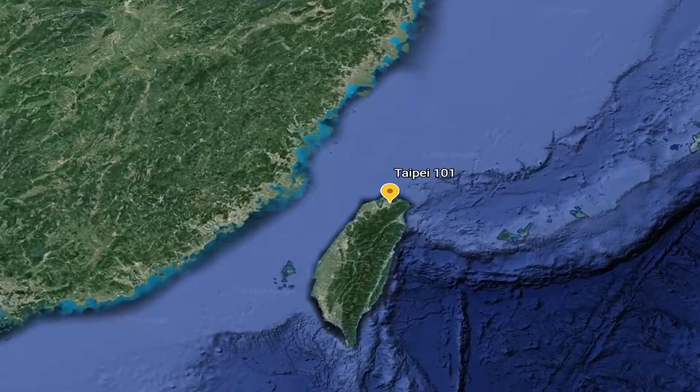Do you remember where we can find Taipei 101? I have mentioned that Taipei 101 is in the upper side of Taiwan, near a river. Its location is also where the earthquakes occur often. Raising a tallest building at that time in that kind of dangerous area was a challenge.

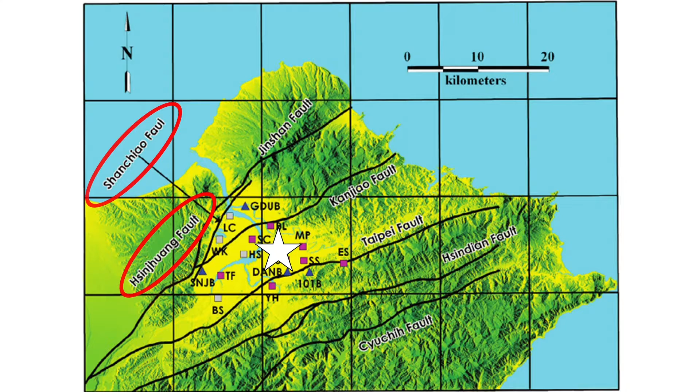As you can see here, 4 fault lines, a belt that seismics occur often, were closely located: Taipei Fault, Kanjiao Fault, Shanchiao Fault, and Hsinjhuang Fault. Among those, Shanchiao and Hsinjhuang fault lines were the major ones, usually causing micro-earthquakes which were less than magnitude 2 before the construction of Taipei 101.

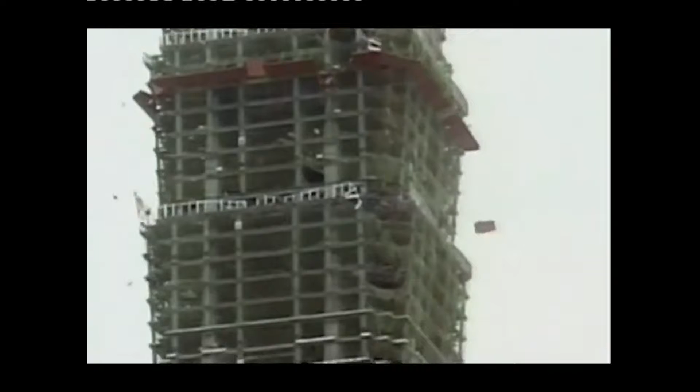Interesting things happened after the construction had started. The magnitude of the earthquakes started to go over level 2. The start was the one that occurred in 2002, during the construction. It destroyed the crane as a result. Many started to wonder if the increase of the magnitude of the earthquake is due to Taipei 101, considering the weight of the building.

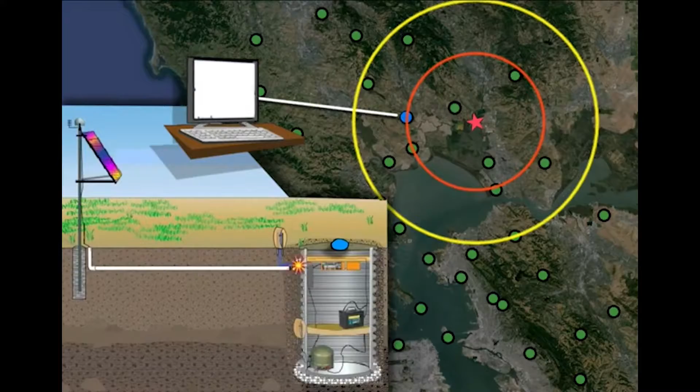Geologist Cheng Honglin once mentioned about this. He suggested that the stress from the skyscraper may have reopened an ancient earthquake fault, since after the construction was finished, 2 larger earthquakes, magnitude 3.8 and 3.2, directly beneath Taipei 101, which were big enough to feel, occurred.

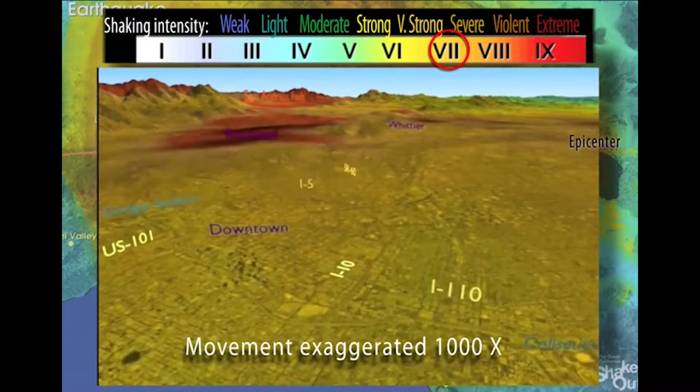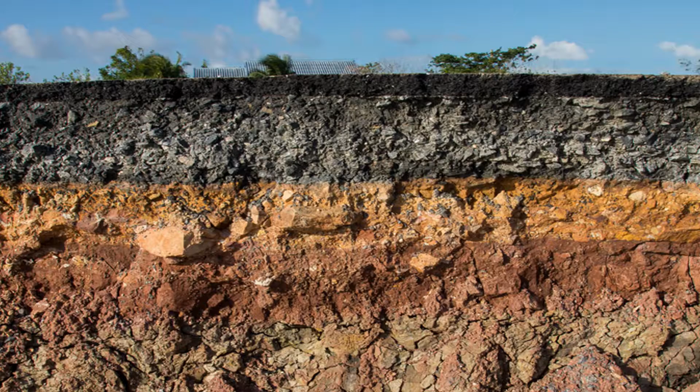On the other side, there was John Vidale, an earthquake expert, who stood against that suggestion. John mentioned that a building will change the stress on the ground below, but this will not be enough to reach the level where earthquakes occur. He concluded that Taipei 101 does not affect earthquakes in that area.

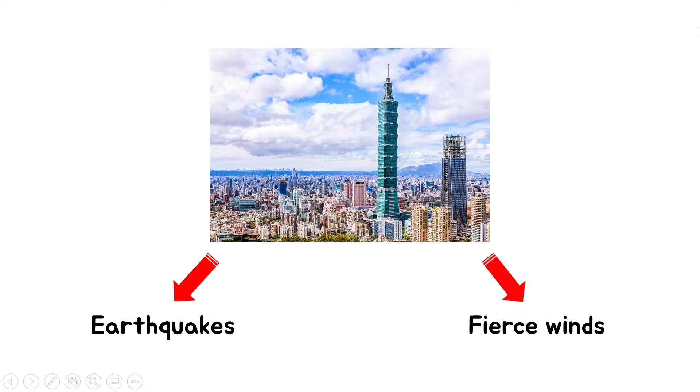Through this argument, what is important and what we must focus on is that Taipei 101 is prone to earthquakes and fierce winds common in its area. The engineers had to design a structure that could withstand gale winds up to 216 km per hour and the strongest earthquakes. Typically, a skyscraper must be flexible in strong winds, yet remain rigid enough to prevent large sideways movement.

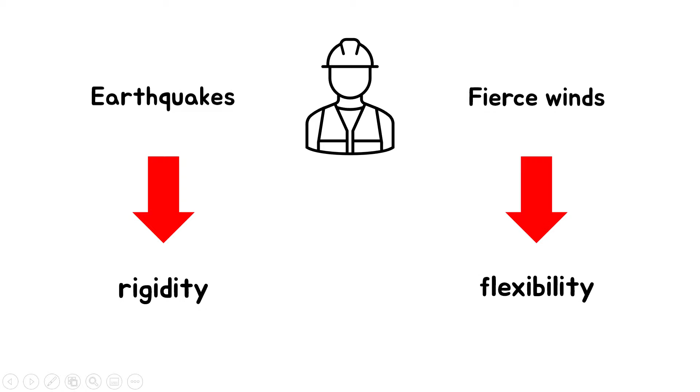Flexibility prevents structural damage, while resistance ensures comfort for the occupants and protection of glass, curtain walls, and other features. Most designs achieve the necessary strength by enlarging critical structural elements such as bracing. But the height of Taipei 101 combined with the demands of its environment called for additional innovations.

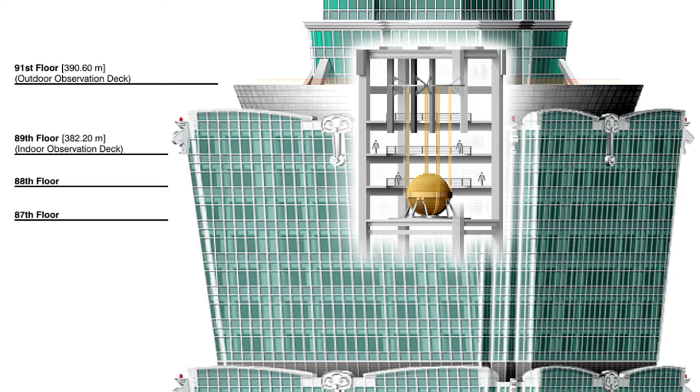To achieve stability and lessen the impact of violent motion, a gigantic tuned mass damper was designed. The damper consists of a steel sphere 18 feet across and weighing 728 tons, suspended from the 92nd floor to the 87th floor. 8 steel cables form a sling to support the ball, while 8 viscous dampers and bumper systems act like shock absorbers when the sphere shifts.

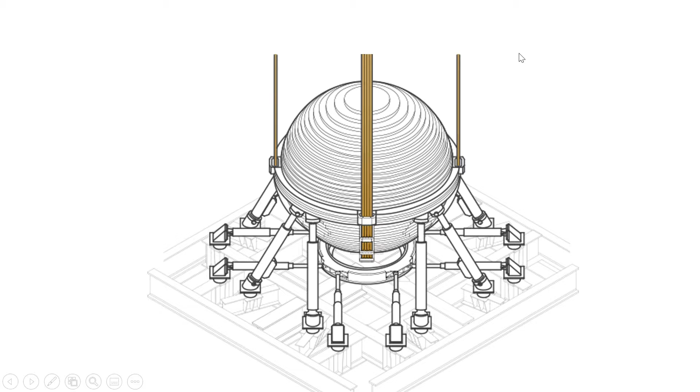How was a damper so heavy able to be applied? The massive damper has a weight of 728 tons, which is too heavy to be lifted with a crane at once. It was divided into some prefabricated sections and welded together. The steel plates, the cradle, and bumper brackets are fabricated on site.

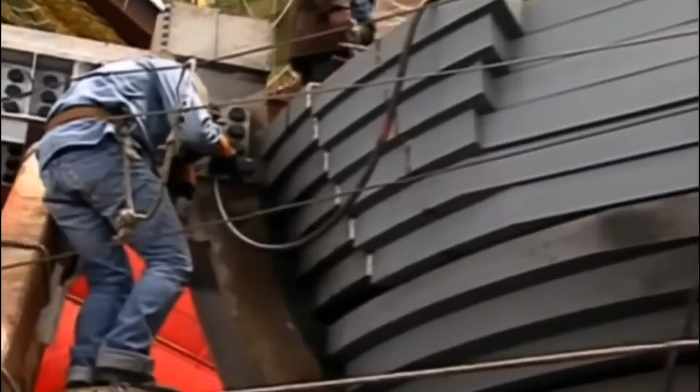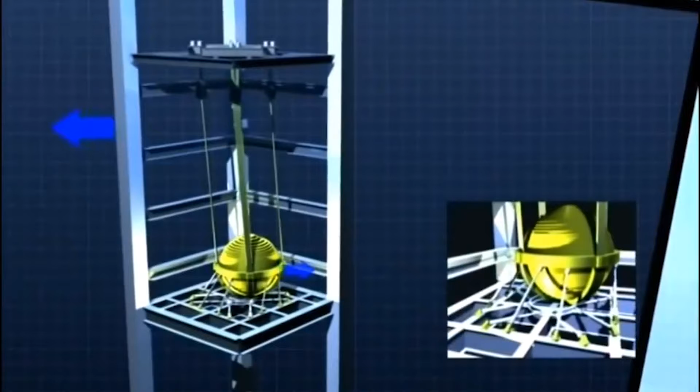It is then hung from thick cables and tuned to make it swing in exactly the opposite direction of the building. That was a brief explanation of the function and structure of the tuned mass damper. Now, let's go deeper for better understanding.

First thing that we will go through is the basic principles of the TMDs. The main purpose of the TMDs is to act as a counteragent to absorb the kinetic energy that occurs when a building moves. Let's look at this principle with a picture.

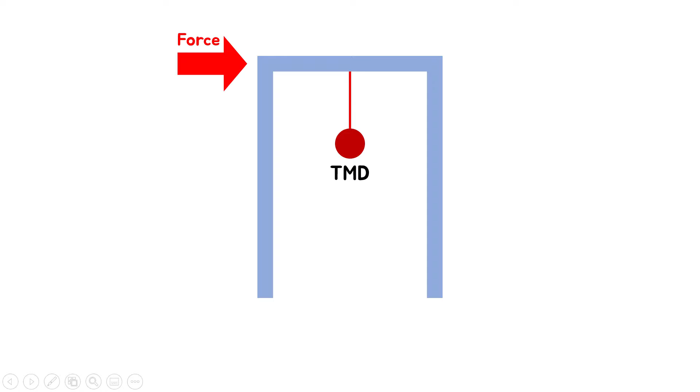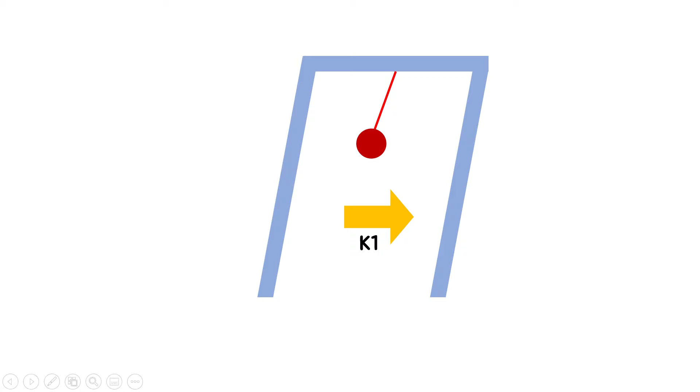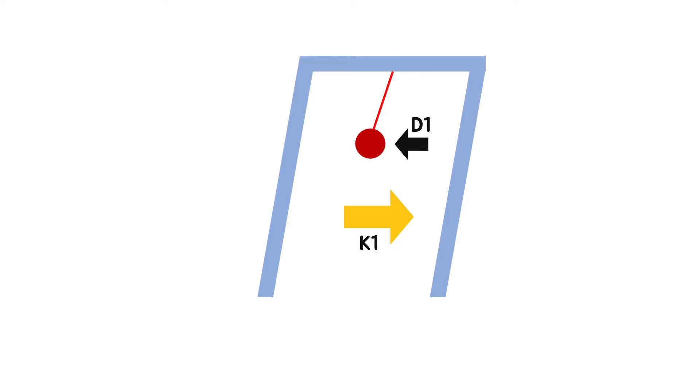Here is a virtual building with a TMD connected within. If a force works on this building, the building will sway. When the structure starts to sway, thereby generating the kinetic energy K1, the TMD is set into motion by means of the pendulum and forces the building to the opposite direction by the counteracting force D1. The same scenario happens when the building sways in the other direction.

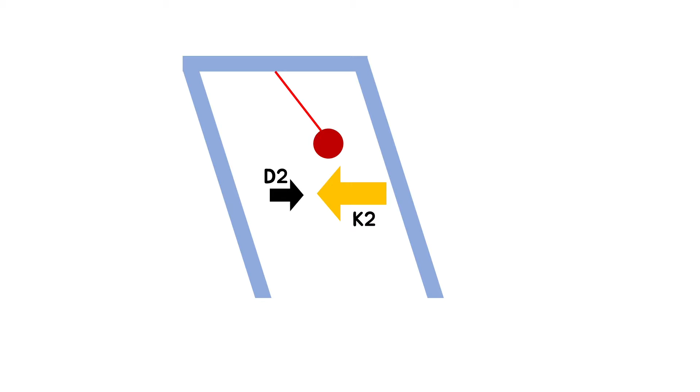In summary, the main idea of the system is to match the frequencies of the TMD with the inherent frequencies of the building itself. There are several types of dampers, and the tuned mass damper belongs to one of them. Knowing the type will help for better understanding.

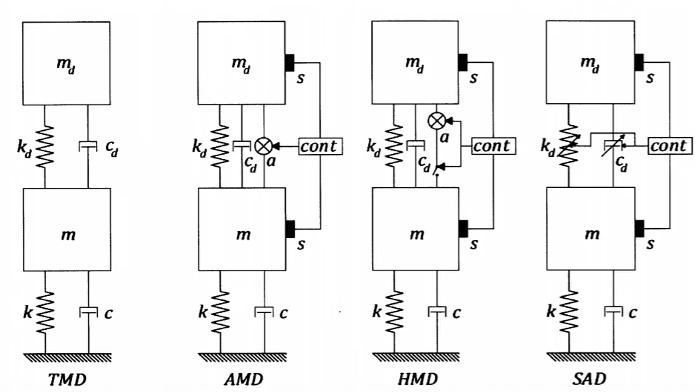Although Taipei 101's website introduces it as a passive damper, it is actually closer to a hybrid damper, a mixture of passive damper and active damper. Passive damper and active damper are classified according to how they respond to and manage vibration.

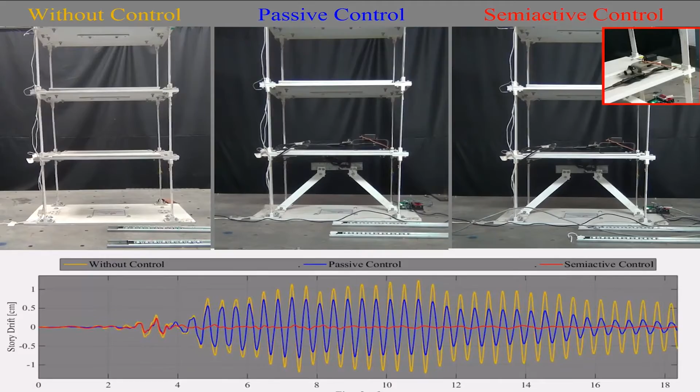Passive damper responds passively to vibration using simple mechanical devices, fluids, or elastic materials, while active damper actively responds to vibration using a closed-loop system with feedback. Hybrid damper can work either as an active damper or a passive damper, according to the loading. Let's take a look at the actual structure of how active and passive damper coexist in Taipei 101.

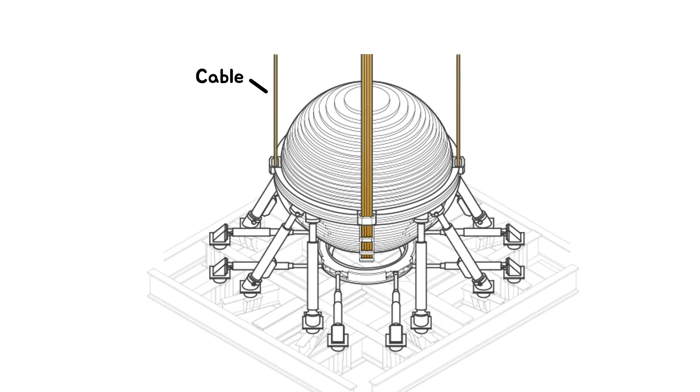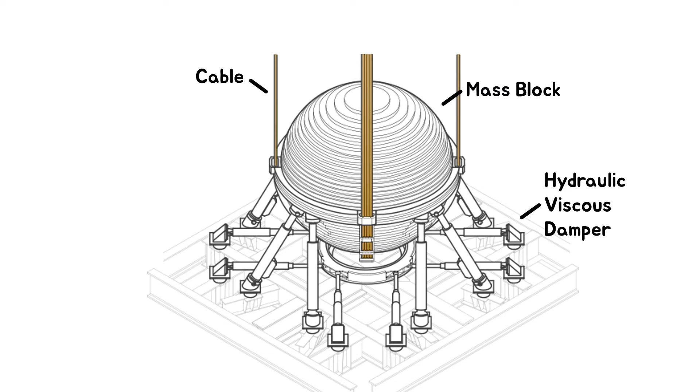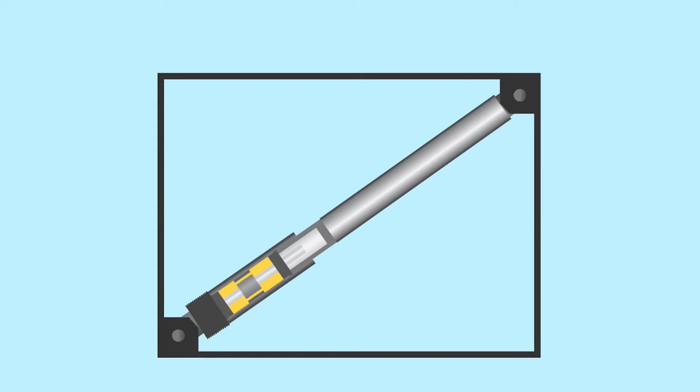The cables connected to the mass block and the mass block act as a passive damper, such as a pendulum. Below it are 8 hydraulic viscous dampers and bumper systems. The hydraulic damper is a device that, in short, converts the kinetic energy generated when a structure moves into heat and then releases it into the air.

Compact but powerful, these dampers increase structural damping levels to as much as 50% of critical. The result being a truly dramatic reduction in stress and deflection. The damper of Taipei 101 has 8 hydraulic dampers connected under a steel ball, which affects the reduction of vibrations in buildings.

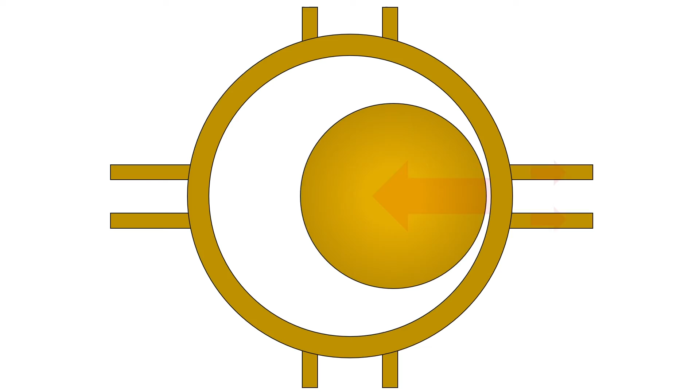There are also 8 snubber viscous dampers in the bumper system, which usually do not affect the reduction of vibration, but prevent the steel ball from falling out of range in the event of a major tremor, such as a typhoon that comes about once a century. These too serve as passive dampers.

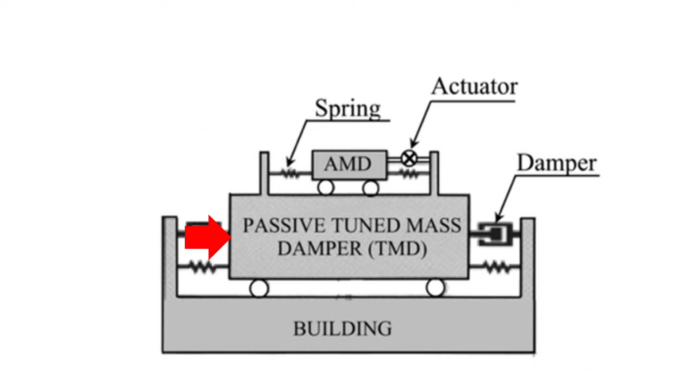As a result, there are 3 advantages. First, there is less risk of instability than active damper. As soon as the structure detects events that can cause the active damper scheme to fail, the system can switch to passive TMD. Second, because the actuator is not used continuously, it costs less and reduces energy costs than the active damper scheme.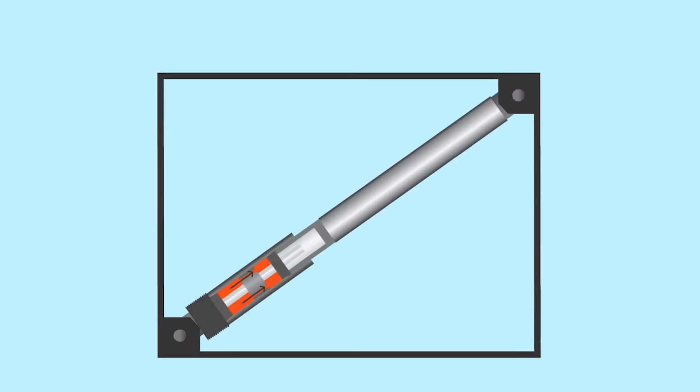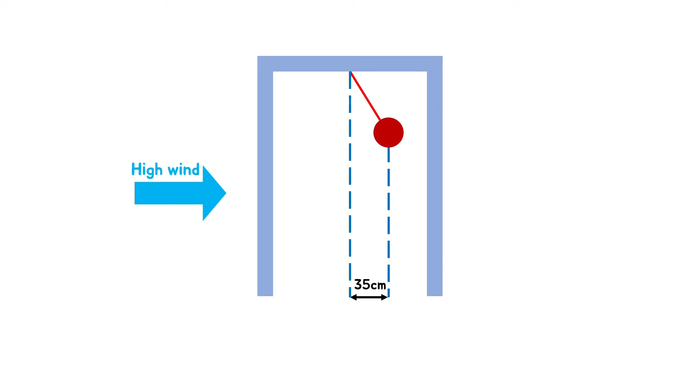Third, since hybrid dampers can apply a force, they still have a way to vary the range of frequencies for which they are efficient. In terms of performance, the TMD has moved up to 35 centimeters during high winds and is designed to be able to move up to 150 during extreme typhoons. It cuts building vibrations by 40%.

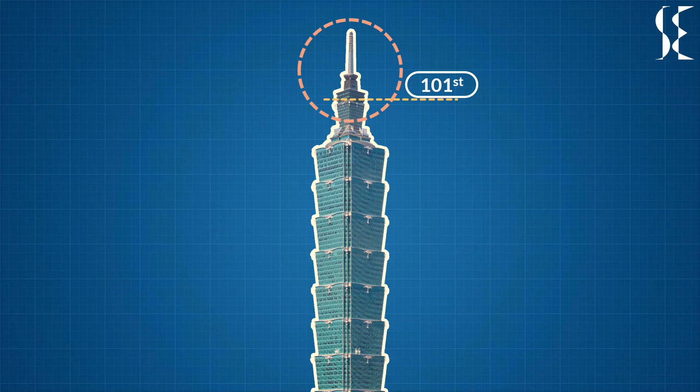In addition to this wind damper, Taipei 101 also uses 2 smaller dampers, 6 metric tons each, on its pinnacle to reduce vibrations by another 40%. Dampers have also been placed on elevators in the building to increase their stability. We spent time mostly getting to know about the TMDs.

As the lateral forces like wind and earthquakes take action, TMDs move opposite to their direction and compensate the movement of the building. Through this, comfort for the occupants inside is guaranteed. Not only the use of the tuned mass damper, but a few more things are applied in Taipei 101 to overcome the seismic issue. So, next week, we will continue on the solutions for seismic issues.